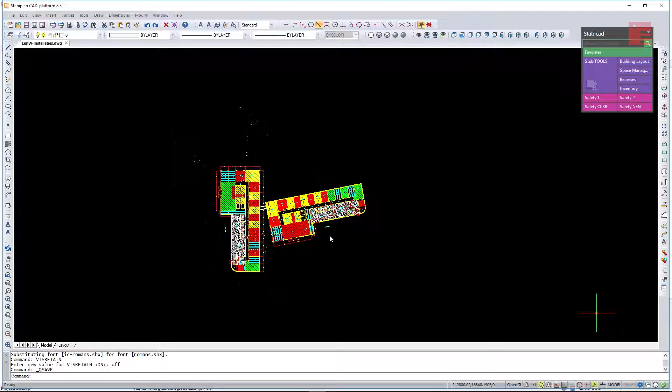Here's a drawing which has been linked as an Xref to a system drawing. You can see different colours and layers, text, dimensions and hatches. It's a drawing in which the installations are not clearly visible.

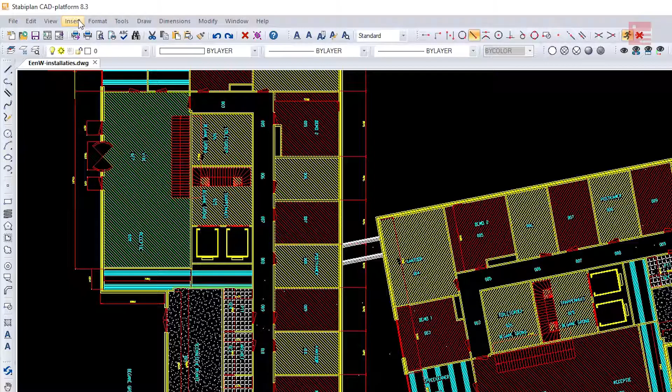Let's fix this. Go to Insert, Xref Manager and open the underlay directly from the manager. Use the function Cleanup Drawing to clean it up. To do this, we go to the StabiTOOLS palette, tab Setup, third button, Cleanup Drawing.

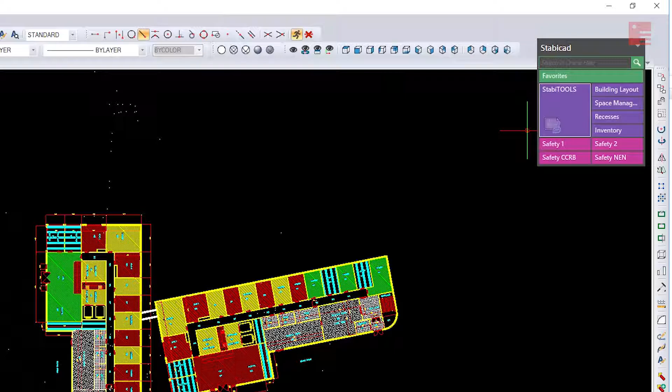Now a wizard starts and you can set your preferences. The first screen that's now displayed is also the most important for the end result. By default, the function leaves the elements in the drawing on the layer which they have been drawn.

Depending on whether this is desired, select Maintain in the column Move to Layer, or select a general layer for all geometry. Let's click the text Maintain behind Building Geometry, and select the general layer.

Click on the little sun behind Annotations, and change it to the ice crystal. This means the annotations will not be visible anymore. Also do this for the hatches.

Click on Complete. The drawing is now being cleaned up. In the status screen, we can see it is cleaned up. The screen also shows what's happened exactly.

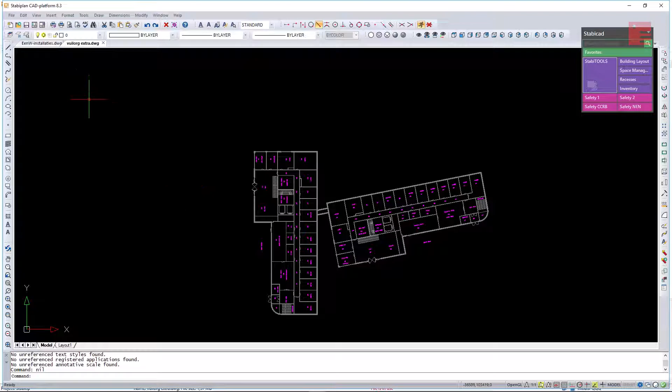Click on Close and now you have a much clearer overview of the drawing. Save the Xref. Shut it down.

Let's now reload the Xref in this installation drawing. Go to Insert, Xref Manager, Reload. This looks a lot more calm.

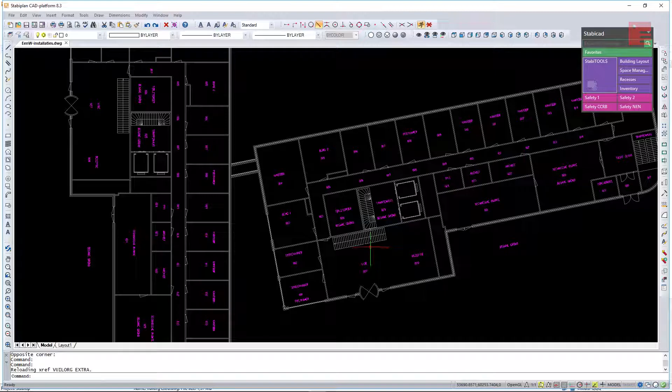We can still turn layers of the architectural drawing on or off in our own drawing. Go to the Layer menu and switch the dimensions on. Save the drawing and close it. Reopen the drawing and the dimensions are switched off again.

This behavior can be influenced with a variable. You can type in this variable. Type visRetain. This one needs to be switched on.

Save the drawing. Switch on the dimensions layer. Save the drawing and close it. And open it once more. Now the dimensions are indeed visible.

Now the architectural drawing will be displayed as it is determined in the system drawing. The advantage of this is that the settings for displaying the layers will be maintained when replacing the architectural drawing with the new version.

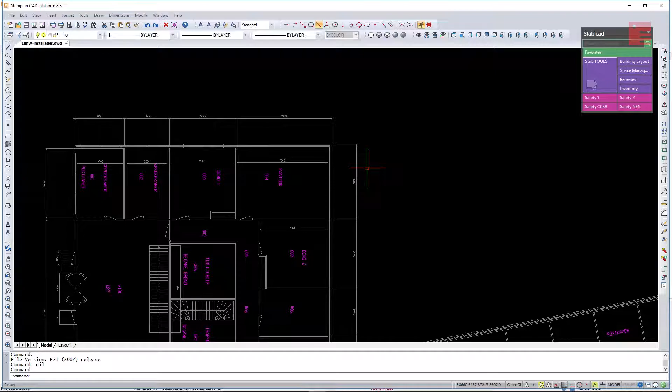With this tip, I hope to have helped you gain more control over the drawings you are provided with.